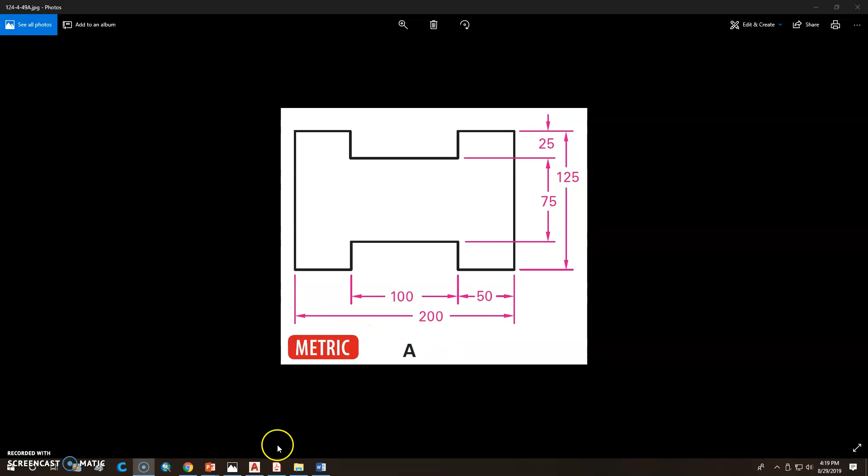All right, so we're going to go ahead and go into AutoCAD. Click on AutoCAD, and since it's a metric part, let's click New. We can click that New there, click AutoCAD, and then Open. Our origin's down here in the bottom where the UCS is.

Now, before we get started, one of the things you're going to have to do with metric parts, because AutoCAD only works in units, is that it doesn't recognize inches or millimeters until you start to print something later on. It's going to just work in units, so one could be 1 inch, one could be 1 millimeter, it could be anything that you want it to be. It's just we're going to use it in units here.

So before we get started, the last part we made was kind of small and everything fit, but it's always a good idea to maybe start off with limits. So type in the word limits and hit enter, and go ahead down here and click that off. So you're going to turn it off. Now you can zoom in and out as you need to, and I'm ready to click a line.

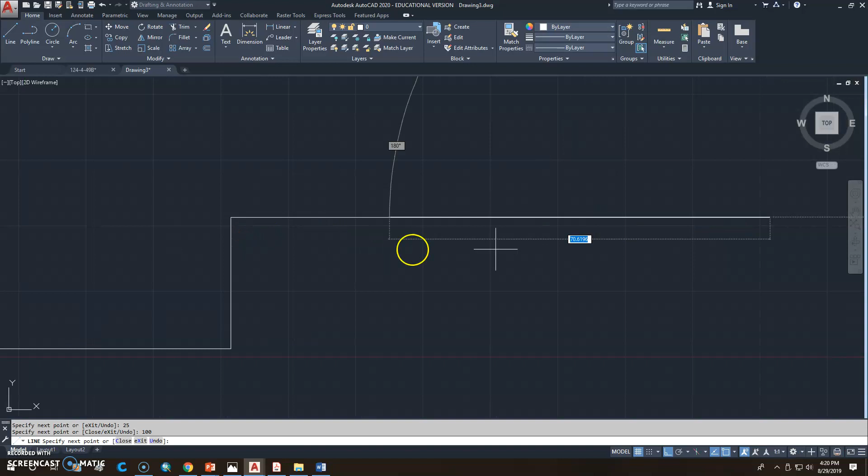I'm going to start by making a line and going to the right. I'm going to hit F8 to turn the ortho on, so ortho keeps things lined up, straight up and down. We'll go this way 50, and then I'll zoom back with the mouse wheel. So I'm going to scroll the mouse wheel backwards, and it'll go back that way. And then I'm going to move the mouse in this upward direction and go 25. I'll move it to the right and go 100. And then I'm going to scroll the mouse wheel back or pan over and come down 25. Then I'm going to go to the right another 50.

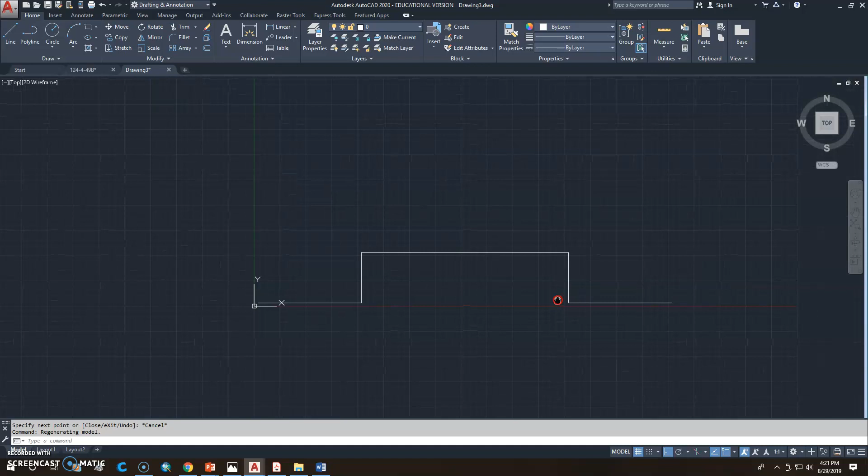And let's see, I should be able to pan or scroll back. Oops, well, that's really messing up on me. I hit escape, so something messed up, so I double clicked. I hit escape to get out of that. So this gives me an opportunity to show you something else, which is fine.

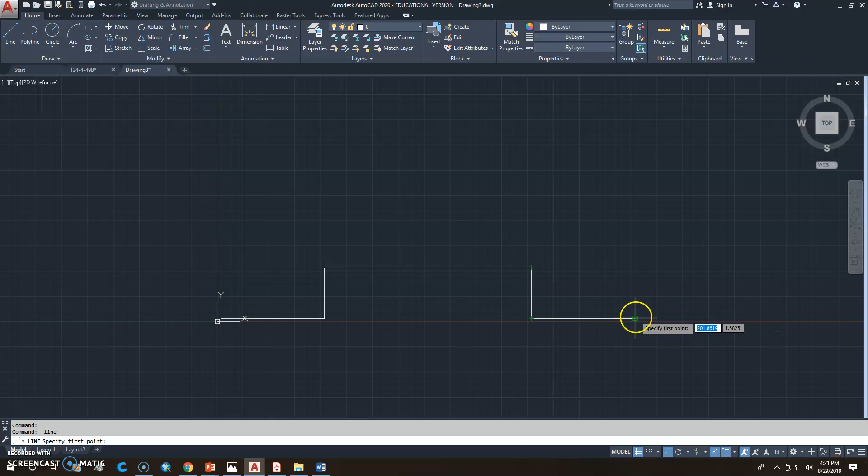So I'm going to start again down here. Not start again, but I'm going to start on that line right there. So when I click line, I'm going to come down here and see that green dot that puts on that? It's putting that green square on there. And that green square is called a grip. You use OSNAP settings to do that. We're going to go ahead and click the OSNAP setting on the end and click endpoint. See that? I don't even have to be on the end. I can kind of go, oh, it looks like it's looking for an extension there. I want to get close to the end, click end, and then move upward here.

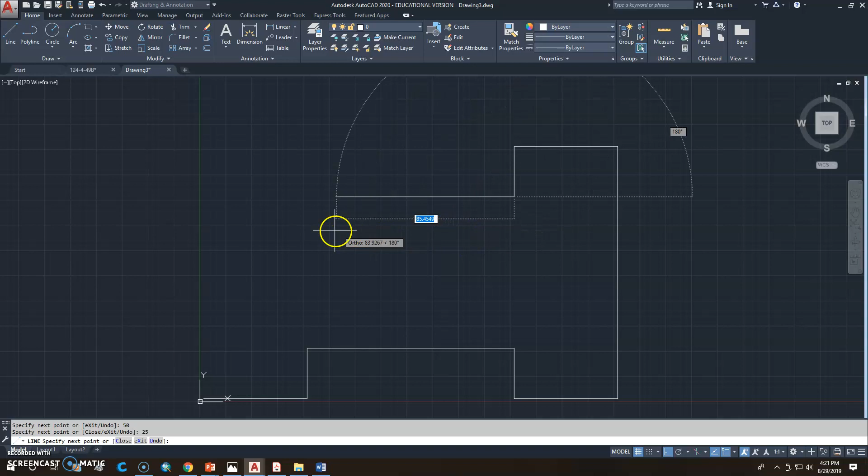I'm going to go up 125. I'll pan down, go to the right 50. I'm going to come down 25. I'll go to the left there. Did I say to the right? I meant to the left.

Go to the left 100. Go up 25. Go to the left 50, and then I'm going to come down 125.

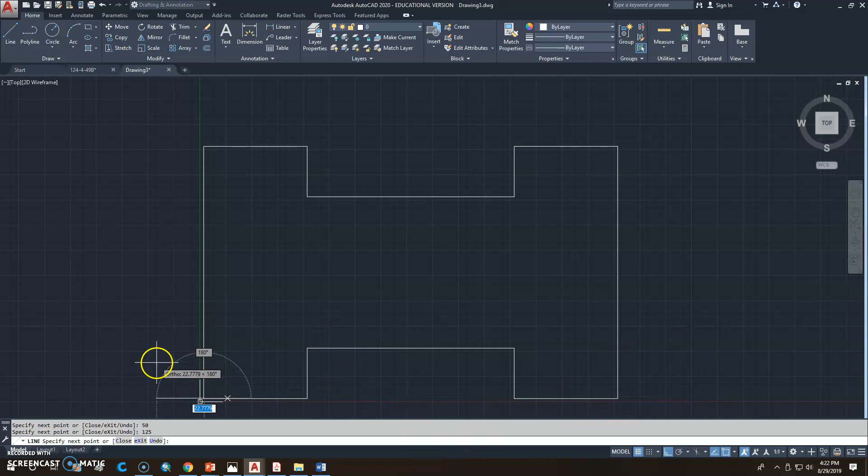I can't hit C to close there because I started over here, but once I get that done, I can hit escape and I'm good. I started that line over here, so I did two different operations instead of one, so I can't hit C to close. But I got to use the OSNAP setting there on the end.

So now I'm going to double click the mouse wheel. If I don't double click the mouse wheel, my plot's going to come out bad. So I'm going to double click this, so it zooms to the extents. That's going to make my life a whole lot easier in the long run here.

Sometimes AutoCAD has this tendency to put a little dot here or there that throws things off. And if I ended up with some weird little dot like out here, something like that, and I didn't know it was there, and I think I'm okay later on, and I double click my mouse wheel.

Now what? Do you see what just happened? It's not zoomed to the extent. So I double click the mouse wheel to zoom to the extents. Oh look, it puts this thing out here.

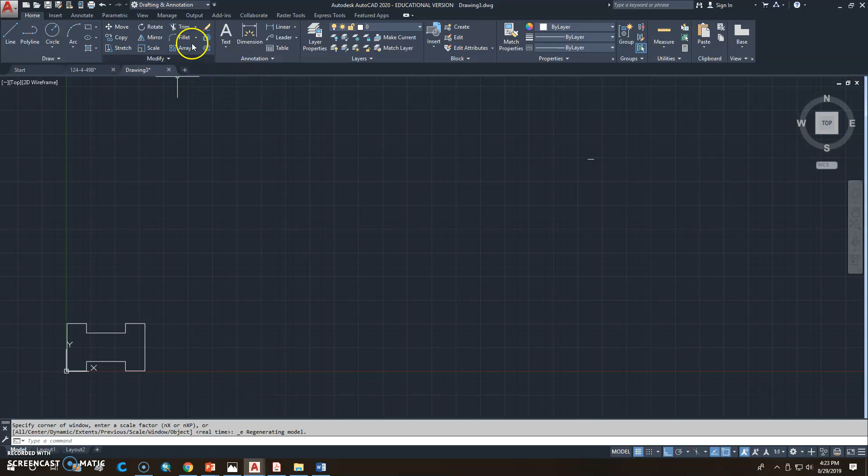So I can use a tool like the erase tool. Right here is the erase tool, so I can erase by going over that and hitting enter. All right, double click your mouse wheel now, it zooms to the extents.

I'm going to come up here and go to this export, just so you know, I can plot this, right? This is not the one we want to do because we cannot control the scale at all. So we're not going to do that.

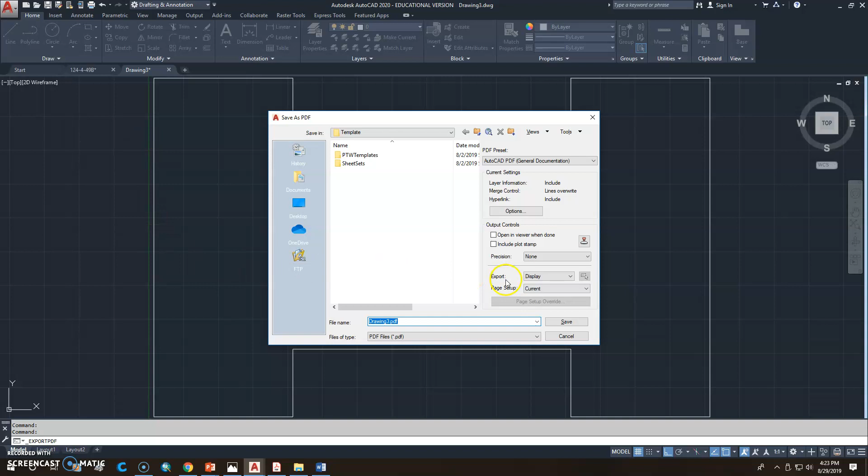All right, what we want to do is go to print, and we want to control the scale of this by going down to DWG to PDF. So we're going to make this drawing file that we've created into a PDF. And we're going to change it to the extents because that's what's on the outside there.

We're going to center the plot. We don't have to do any of that ridiculous math we were doing when we were drawing on the board. And I'm going to click Fit to Paper and change this to 1:1. Let's see what happens. Does it go off my page?

So I'm going to click Preview, and something's wrong. It goes way off the page. So 1:1 doesn't work for this. So we have to go back here and try something else.

So maybe let's try something like 1:10. Does that work? Still red there, so I don't think that's going to work. So let's try 1:50. 1:50 makes that really, really small.

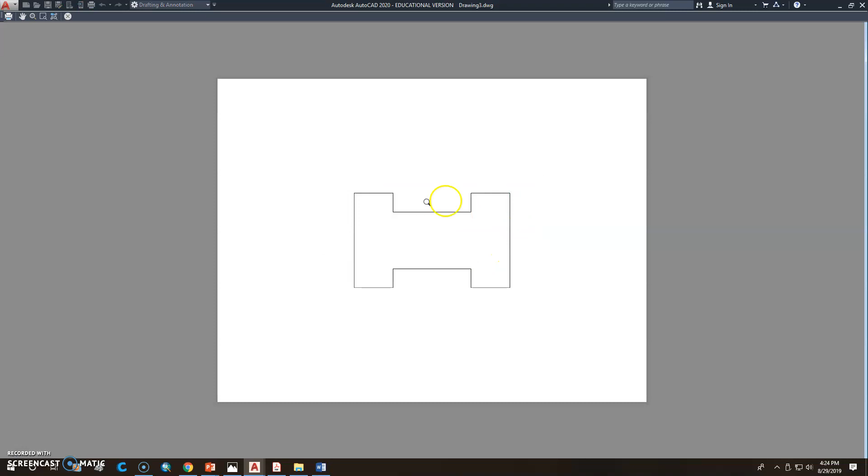So if I preview that, do you want to continue? That's fine. Yeah, I'm going to continue just to prove the point. See, that's way too small. I want to get that larger, but be at a decent scale. So I'm going to right click and exit this so it goes back to here.

So 1:50 didn't work. Let's try 1:30. 1:30 fits. 1:20, that does not. It goes off the edge of the page.

So let's preview. It's okay. See, it goes off. It goes out of our print area, so we can't do that. So we're going to have to go back to, instead of doing 1:20, we're going to do 1:30. So now we figured out the largest scale we can use to fit.

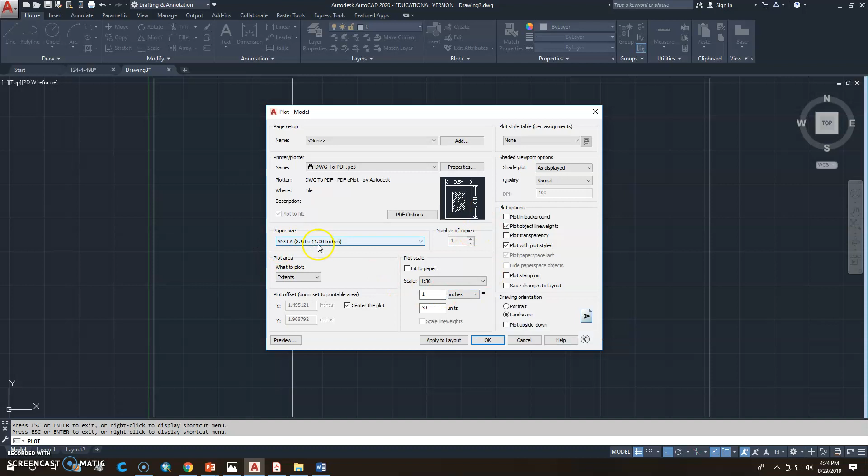And this happens when you're doing things in metric and you're trying to put them on an English paper. All right, so that's okay.

So this time I'll preview it. I'm okay with that right there. Right click and plot, and this creates that.

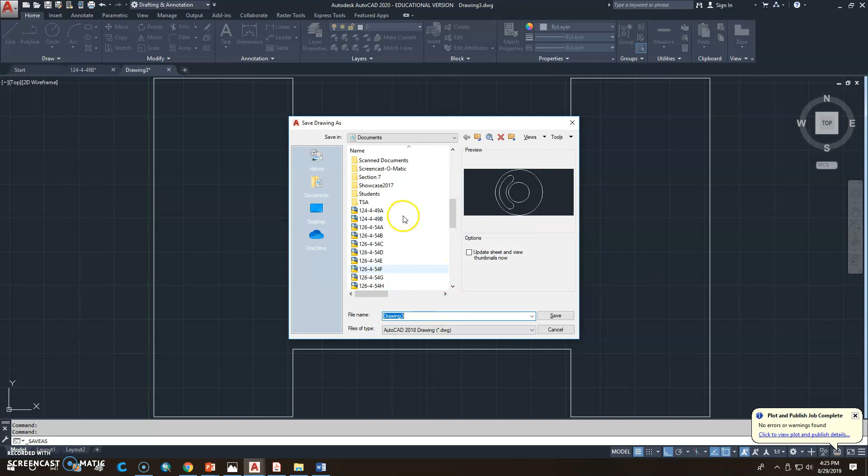Oh, I totally forgot. I'm going to go back here and click Save As, and I'm going to save this as one. This one was 124-4-49A. I'm going to go ahead and overwrite the one I have.

Oh, is it even in the right spot? It should be okay as far as that goes. Yeah, I'm in the right spot. So we'll save that as that. I'm going to overwrite it. And now I can do my plot.

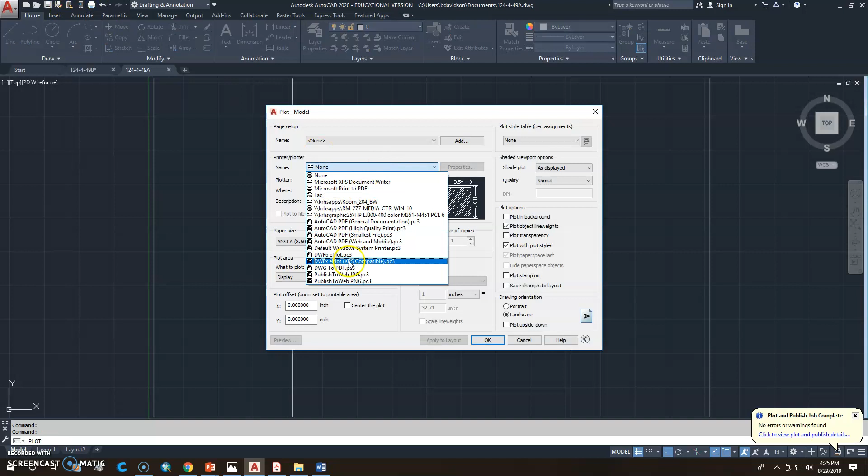So we've already explained it. I'm not going to explain it again. I'm just going to do it real quick, just so we know.

1:30. Click Preview. It's okay to do that. Right click and plot. So that's where we get to this point right here, where that's what you would submit in Blackboard if you were getting a test or something like that.

All right, we're ready to move on to the next part, so we'll do that in a second, but that's how we're going to do stuff in metric.